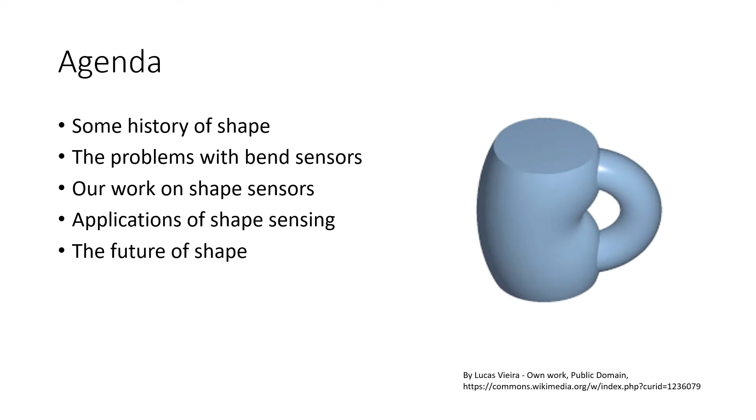And in particular, we'll be talking about ShArc sensors and explaining what those are and what properties they have and why they're so interesting. Then we'll move on to applications of shape sensing, and I think you might find some surprising ones in there. And finally, we'll talk a little bit about the future of shape itself and how that will impact our future lives.

Let's start with a simple example. Let's say I gave you this mug and asked you to measure its shape very precisely so that somebody remotely could look at your measurements and reproduce it exactly. That's actually a pretty hard task if you're using traditional tools. For example, tape measures and calipers are really good at measuring linear distances, but they're not good at measuring curvature.

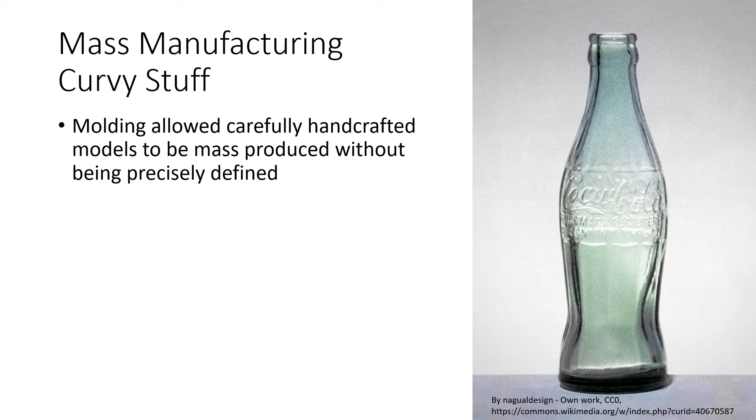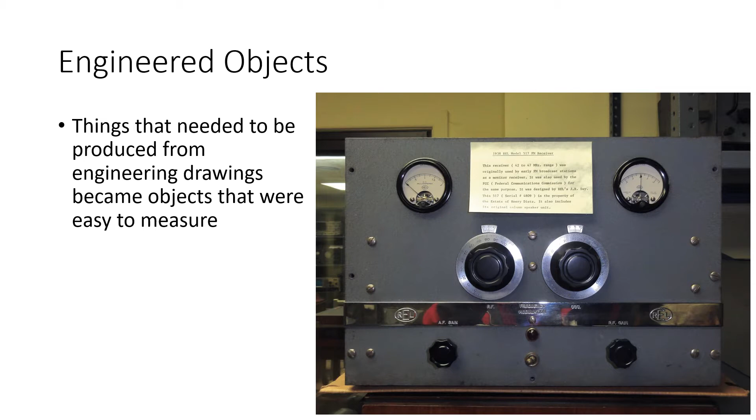Well, as time wore on, clearly there were engineered objects that needed to be done with precision so others could reproduce them. So if you look, for example, at electronics in the 1930s, you could see that they tended to have very geometric designs that were very easy to describe. So this particular object here is actually the first commercial FM radio. I have a connection to this because the case for this was actually designed by my dad in 1938. And you can see that the design here, very simple rectangular things that are very easy to measure using simple tools. And the circles, again, also very simple geometric constructs, very easy to measure and describe.

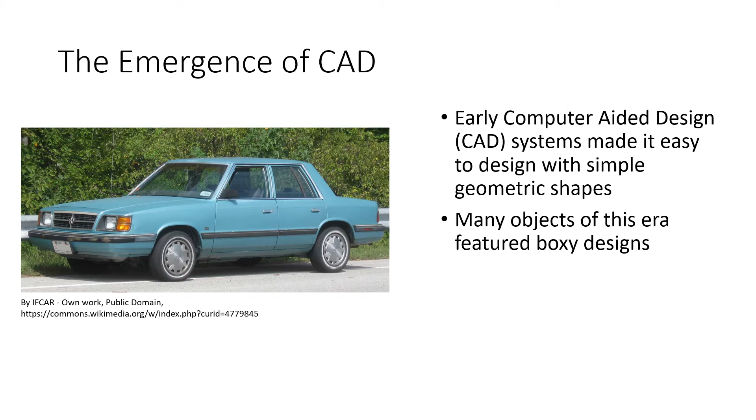By the 1970s, CAD, or computer-aided design, had started to emerge, and we could design far more complex objects using these computerized systems. But those early systems really didn't have good tools for describing shape. And so a lot of the objects that were designed in that era were really combinations of very simple geometric forms. And you can see that in this example of what personally I consider the ugliest car ever made, the Chrysler K cars, that they had these very boxy designs. And to some degree, that was a result of the CAD tools that were used to describe them.

It's often said in design that form follows function. But it's equally true that form follows tools. The sorts of tools that we have available to us very strongly influence the sorts of designs that we make. So if we have tools that make it easy to do simple geometric forms, that's what we tend to design. And that influences even our imagination about what sort of shapes are possible.

I think the best example of this is if you look at the spacecraft of science fiction from the 1970s, they tend to be collections of simple geometric shapes. The Death Star from Star Wars being a simple sphere is a great example of this sort of thing. After decades of drawing tool evolution, we got to the point where we could describe complex curves fairly straightforwardly in our tools. And then you started to see in science fiction that the spaceships that we imagined were very curvy and had very organic shapes. Form follows tools.

So what we've talked about up to this point is static shape. But things get much more interesting when you allow them to evolve and change in dynamic ways. So it turns out that the tools that we have right now are actually very good for describing complex curves, but they're not very good at describing the evolution of complex curves.

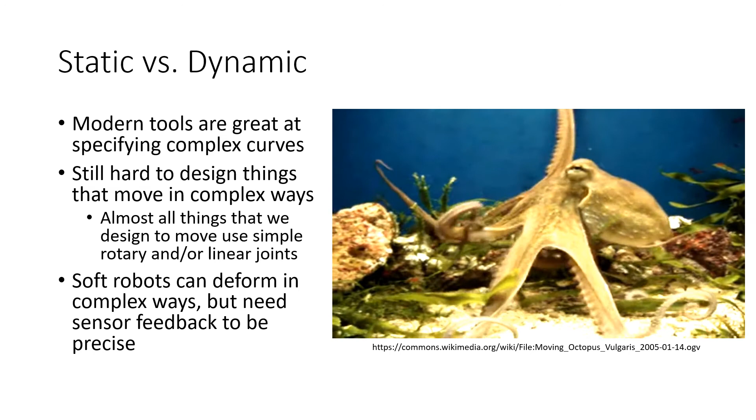It turns out that human motion is also very complex. You might think, oh, well, we just have a bunch of simple joints. But in fact, those joints move around in very complex ways. And there's a lot that you can do with them and the surrounding muscle and tendons that's very non-obvious. We need to understand human motion for a lot of different applications. So for example, if we want to put people in virtual reality spaces, we need to be able to have an understanding of pose in real time. And unfortunately, that's still a poorly understood problem.

There are other places where this need comes up. For example, in understanding how athletes perform, it's often necessary to use sensors to understand their particular pose and how that evolves. Another place is in medicine, when you're trying to get an understanding, for example, in rehabilitation therapy, of how joint movement is evolving as the therapy progresses. These things all need ways of sensing complex human motion.

Well, the way we try to solve this problem now is with these resistive bend sensors. That's the most common solution. And resistive bend sensors are very inexpensive, which is fantastic. They've been around for well over 20 years, but they have a lot of drawbacks and limitations. So the way these things work, they're basically a strip of plastic on which carbon has been deposited. And so when you bend that strip, the carbon is actually strained and pulls apart if you bend it one way, or compresses the other. And that changes the resistance across the strip. And so what you measure with this sensor is the resistance, which is a function of the flex it's undergoing.

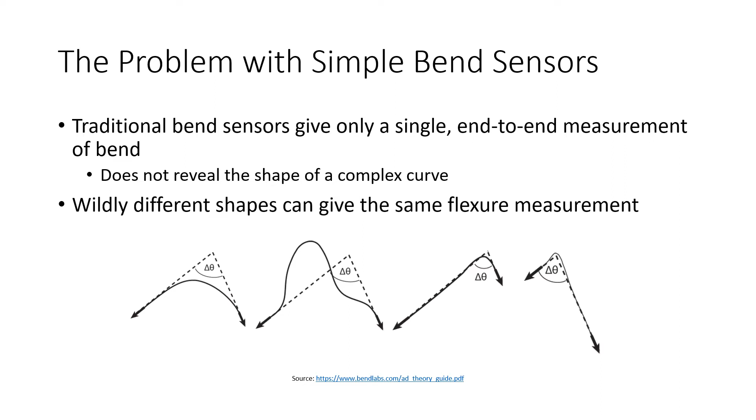So traditional bend sensors are really restricted to cases where you have a single bend. But if you want to measure a complex curve with many bends, you might think, aha, I'll just use a bunch of these bend sensors connected in series so that I can measure all those complex curves. That turns out to be problematic for a very simple reason.

The angular error that you measure at each joint accumulates so that by the time you get to the end, your understanding of the angle is the sum of all the measurement errors along the way. It's this box that you're in. The more encoders you add to get a good understanding of the curve, the more the measurement error increases. That's why these systems are fundamentally not a good choice for measuring complex curves.

So now we get to the really exciting part. And that's the sensors that I've been working on, which are true multi-bend shape sensors. And we call these ShArc for shift arc. And this video explains the basic idea.

ShArc is a precision geometric measurement technique for creating multi-bend shape sensors. These devices are designed to detect curvature in the XY plane. Most bend sensors report only a single number, which is a gross measurement of overall flexure. In contrast, ShArc sensors can provide detailed shape, even when there is more than one bend along the sensor.

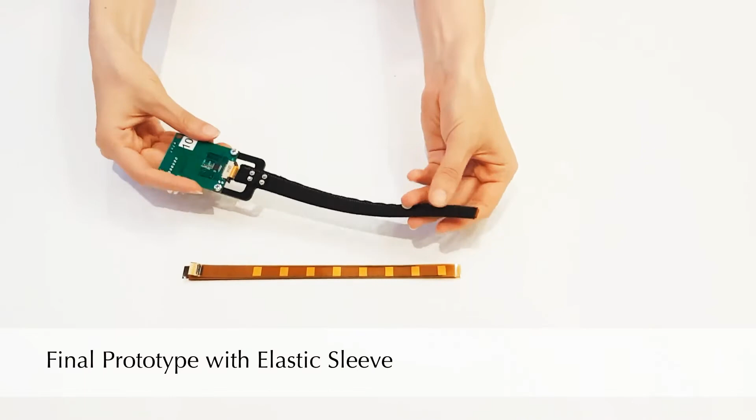ShArc sensors are built using 2 flexible strips that are held a constant distance apart. In our prototype, there are transmit and receive strips that each contain a series of carefully designed electrodes. The spacing between the transmit and receive strips is set by a series of spacer strips. A small clamp on one end binds the stack, and an elastic sleeve keeps the strips aligned and pressed together. A circuit board measures the capacitance between the electrodes on the transmit and receive strips.

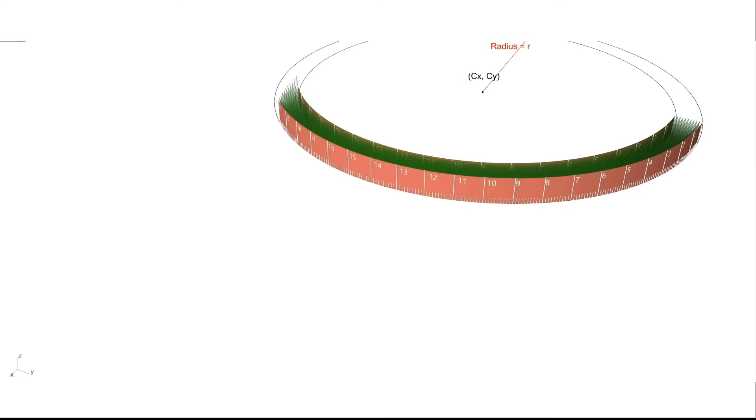ShArc sensors work by measuring relative shift to fit arcs. Imagine 2 measuring tapes held a fixed distance apart and joined on one end. If this unit is held flat, the measurement marks on the 2 tapes will align. But if the unit is formed into a circular arc, the inner strip will have a smaller radius than the outer strip. Assuming the 0 points are constrained to a line, the other marks will drift apart. The tighter the curve, the more the 2 sets of markings will diverge.

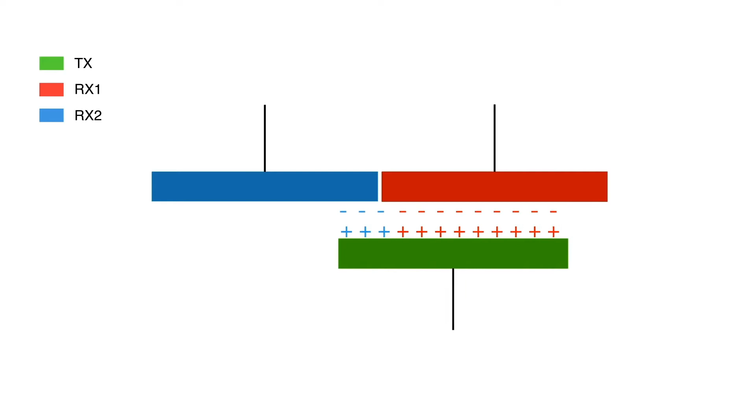This is similar to what happens when a paper book is bent. The binding keeps one side of the pages aligned, but the other side fans out. Our prototype measures shift via changes in differential capacitance. The bottom strip contains a series of transmit electrodes. The top strip has corresponding pairs of receive electrodes. As the transmit electrode shifts relative to the receive pair, the circuit becomes unbalanced, creating larger capacitance to one side or the other. Measuring this differential capacitance reveals the degree of shift.

Our prototype has 8 measurement pairs. When flat, all are aligned, giving 0 differential capacitance. But as the sensor is curved, the transmit and receive strips progressively misalign. By measuring the shift over each segment, we find its radius of curvature. Because the total shift to any measurement point is the sum of the shifts in all of the segments, the total curvature to any point can be found irrespective of any subsegments. This gives ShArc sensors a unique tolerance to measurement errors. Unlike jointed systems with encoders, angular errors do not accumulate with each measurement point.

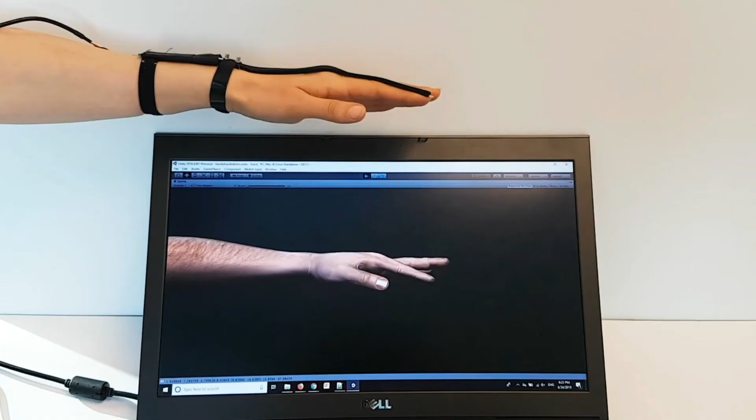We prototyped a number of sample applications for our sensor. Our first demo uses the sensor to detect the shape of a bent finger, as might be used in a virtual reality glove. Because the shape is modeled by many arcs, there is no need to make presumptions about the location of finger joints, as is required with less capable sensors. Given the precision of the device, it is ideal for measuring complex curves on objects.

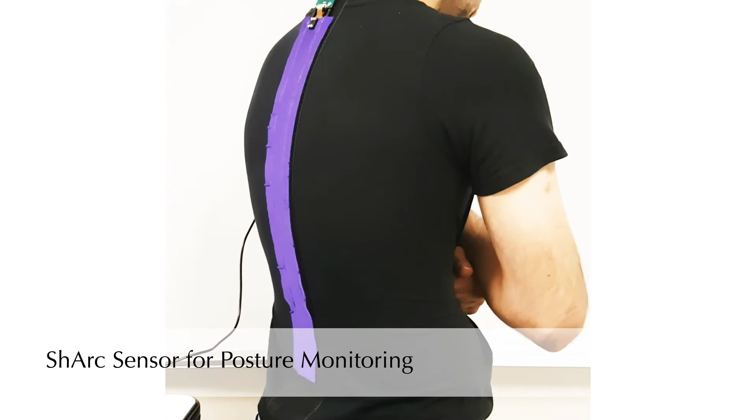Shapes of real objects can easily be entered into CAD or other drawing packages. We created a long version of our sensor to detect curvature of the spine. This is useful for providing real-time feedback and long-term monitoring of posture. This also suggests many applications in physical and rehabilitation therapy.

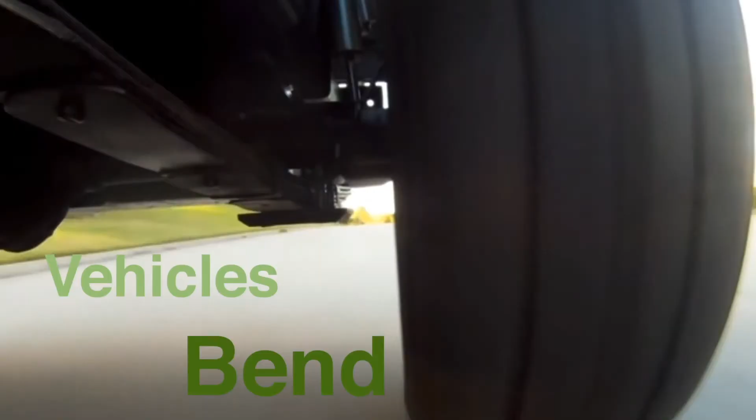Everywhere we look, we see things that bend. ShArc sensors provide a precise and cost-effective way of understanding the shape of our world. Over the last year, we've been busy making a commercialized version of the ShArc sensor that really is a second generation ShArc sensor, which we call BendShape. Here are some of the characteristics of this new version.

Again, it's 160 millimeter sensing length, which is about the same as the first generation. But instead of 8 segments, it has 16 segments. The read time is 6.5 milliseconds. So this means this sensor runs at over 150 hertz. So it's quite responsive, quite fast.

Another key change is that the sensing bend limit on the original prototype was limited to a maximum of about 180 degrees anywhere over the sensor. Well, on this device, the limit, because of a new encoder design, is actually per segment. So the limit here is about plus minus 90 degrees per segment. And in fact, you can coil this thing up into a spiral and actually have that work. So it's a much greater range of motion that this sensor can sense.

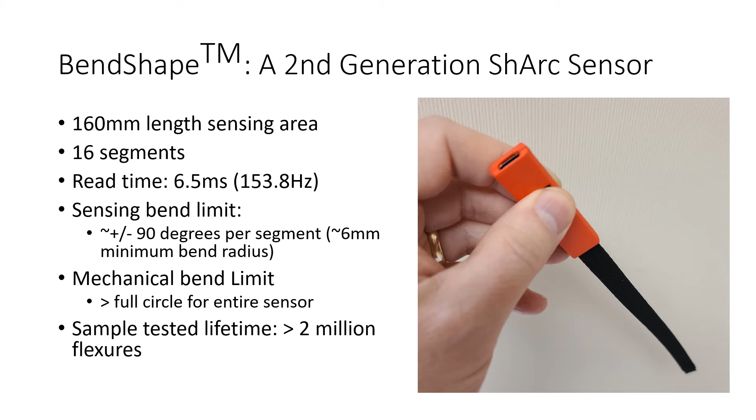Really, the limit on that is the mechanics. So if you want to keep it accurate, you probably don't want to go much beyond a full circle. But for most applications, that's certainly sufficient. And we've also been life testing these devices, and we are seeing lifetimes in excess of 2 million flexures. Basically, we stopped testing after that. So these devices are looking very promising.

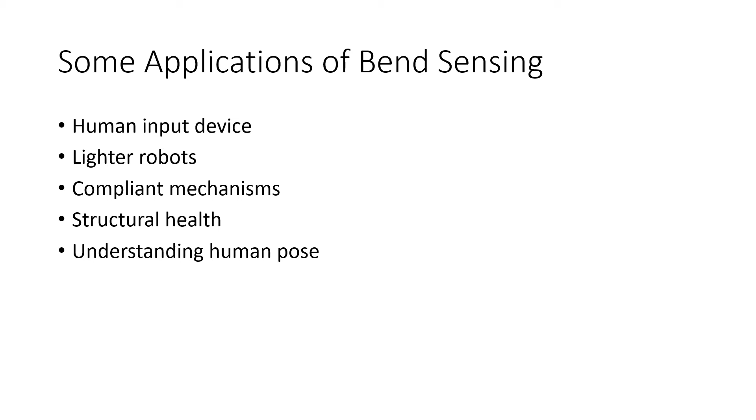Next, we're going to take a look at some of the applications for bend sensors. There are quite a few, and we're just going to touch on a handful, just the tip of the iceberg. Let's consider the use of shape sensors as expressive input devices. Now, shape sensors are kind of like knobs and sliders in that they're physical devices, and you can feel physically where you're manipulating them to. But they're quite different from those devices because they have many degrees of freedom.

Your typical knob or slider is only 1 degree of freedom, but these devices are actually putting out lots of data, and that makes them very expressive. And that's good for a lot of applications where you want to dynamically control some expressive thing. And typically those applications require a fast response, so it's a good thing that ShArc sensors are fast. So I want to give you a little example of this.

We've been working with the University of British Columbia, and we have a paper that we'll be presenting at the New Interfaces for Musical Expression conference later this year. But I want to just show you a little bit about the power of using a shape sensor as an expressive musical device.

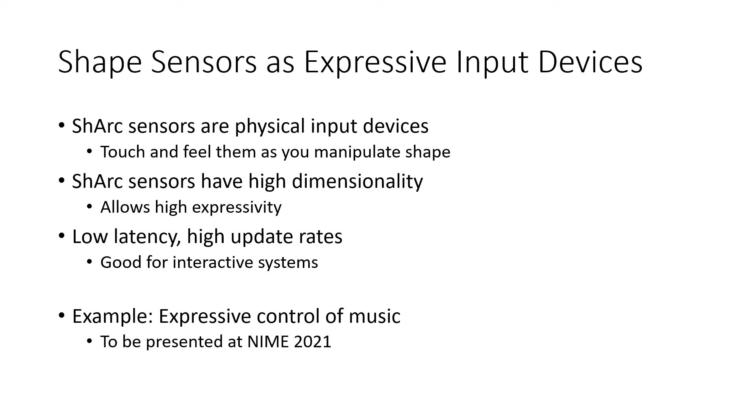For the guitar effect, I created a vocal synthesis engine, which we'll call the VOC plugin here, using Paul Batchelor's VOC library, which is based off of Pink Trombone. This model of the vocal tract treats it as a series of 44 cylinders whose diameters filter an excitation signal to create human voice sounds.

To control using Bend Shape, we partition the sensor into 40 segments and use a Y position value of each of these segments to control the tongue shape of our tract model. To use this as an effect, we can use any instrument as an excitation signal and shape it using the VOC plugin. This next clip demonstrates how it sounds when used on an electric guitar.

Shape sensors are going to revolutionize the way that we build robots. That's a pretty strong statement, but let me explain why. The typical industrial robot arm right now weighs about 10 to 20 times as much as its maximum payload. Now, obviously, that's not true for us. We can lift things easily that are close to the weight of our arm. So why are these mechanical devices so limited?

Well, the answer is pretty straightforward. It's because they count on joint encoders to accurately know the position of the arm. For that to work, you've got to make sure that the arms do not flex, because otherwise the measurement would be off. And so these arms are typically way overbuilt, not just to hold the weight, but to hold it without flexing at all. And that's hard, and it's what makes robots very heavy. And it's not just robots, there's all sorts of mechanical devices that have this problem.

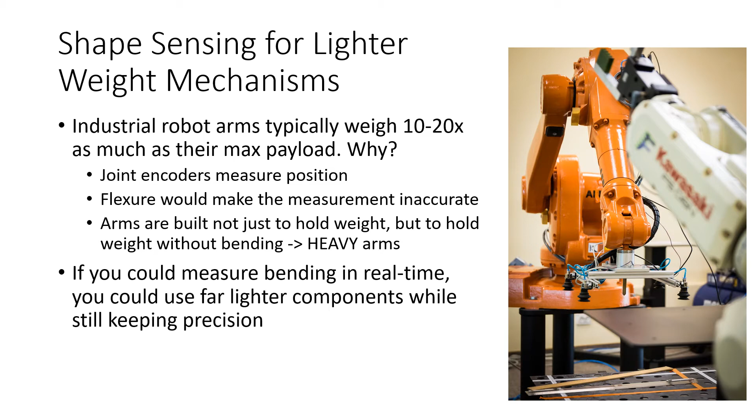So imagine now instead that you had a device that let you understand in real time exactly how the mechanism is bending. Well, then you can put that into your feedback loop, and it's okay if the thing bends. So in fact, you could build much lighter mechanisms for robots and similar sorts of devices. This is going to be a super important application of bend shape sensors.

In our robot arm example, flexure was an undesired thing that we were creating an ability to work around. But what if flexure was actually something that you were using as a design element, that you specifically wanted things to flex, and that was a critical part of their operation? So this field is known as the design of compliant mechanisms.

And so, for example, we've been talking with our friends at Brigham Young University, Larry Howell's group, that has been working on compliant mechanisms for quite some time. And these are a really intriguing thing because it gets around this problem I talked about earlier of most things that are designed to move are designed to do it using either simple rotary or linear joints. But when you design things to flex, there's a lot of advantages to that rather than making traditional joints.

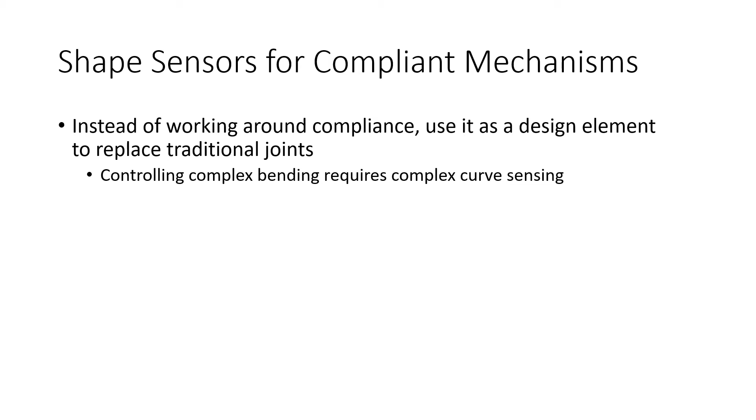The thing to keep in mind is that the problem with doing compliant mechanisms traditionally has been there's no good way to get feedback for their state. Well, shape sensors let you do that. So let me just give you an example from Larry Howell on the power of compliant mechanisms.

It's always been considered to be bad to have flexibility in your machines. Well, we've tried to take that thing that everybody hates, that everybody is trying to avoid, and say, how can we use flexibility to our advantage? How can we use that to do cool stuff? Probably the first compliant mechanism I ever designed was this thing. What it is, is a compliant mechanism that is a gripper. So you can put something in there and it'll get actually a really high force. I can put that in there and it breaks the chalk.

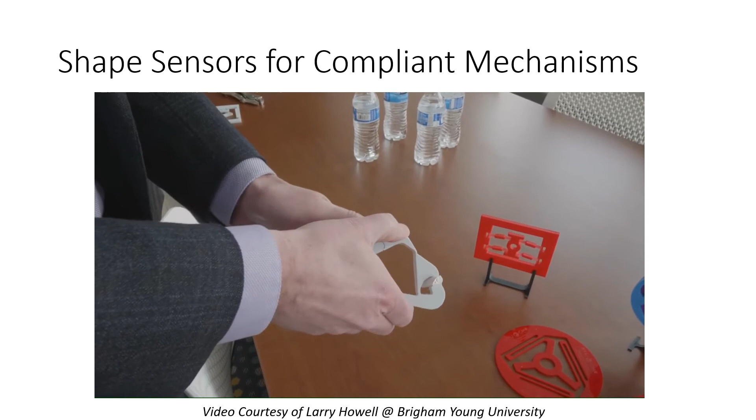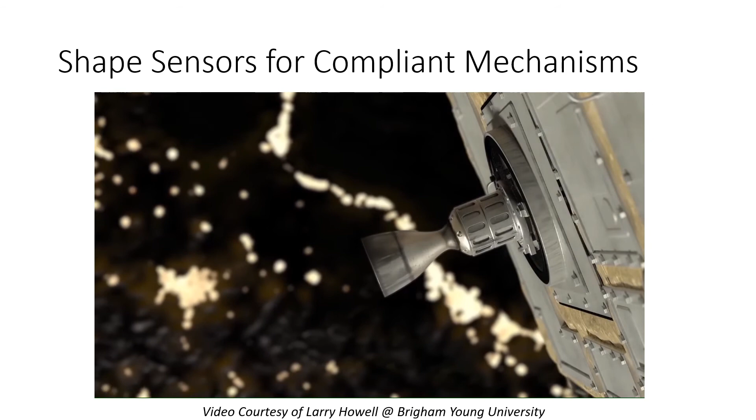So that looks like a crazy beast, but every part in there has a purpose. All these flexible beams, here are the two inputs. And again, we did this with NASA for a thruster application where you can put a thruster right there. And now with our two motor inputs, we can direct that thruster in any direction. That titanium device moves that. And you notice that it's just all bending. And then there's no pinch points for the fuel lines or electrical lines coming in.

Another really interesting application of bend sensors is in structural health monitoring. So we've already discussed that ShArc sensors don't need recalibration, that they can work for decades without the need to recalibrate them. That makes them ideal for monitoring structures like bridges and buildings to see if they're deforming. And so that's a really great application. But in some ways, that's not using the full capability of the sensor because ShArc sensors are also fast. So you can actually monitor real-time fatigue.

So for example, if you consider something like an airplane wing, as the plane flies, the wing is bouncing around all the time. And all that accumulated stress is potentially fatiguing the metal over time. Well, if we can monitor that fast enough, we can actually create basically a gas gauge for materials to know when they're reaching their fatigue limits so that we know when we will need to replace things based on not just how much time they're up in the air, but the actual stresses and forces that were applied to them in operation.

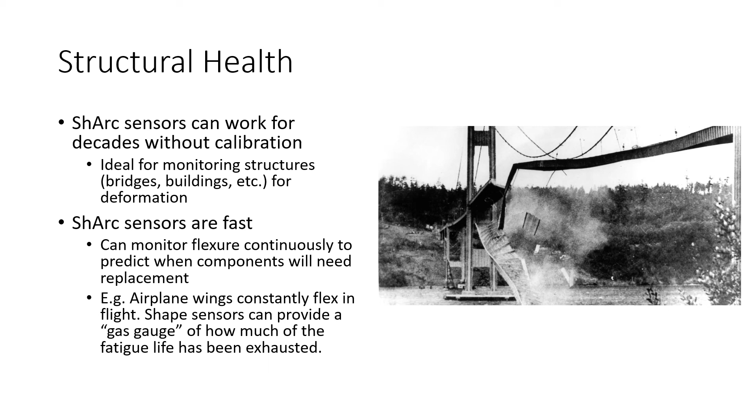These sorts of bend sensors are also great for understanding human dynamics. And I probably don't have to tell anyone here that pose tracking for AR and VR is an important application and something that finally you can do with precision without having to have a device that's offset and looking at somebody, but can actually just be built into their clothing so that you can know with precision what they're doing. Of course, that same technology has lots of applications in things like rehabilitation therapy.

So one of the things that we've realized talking to customers for our bend-shape devices is that there's a huge market for doing clothing that can monitor humans. Just like we do structural monitoring, we can do monitoring of humans to know in the workplace: are you stressing your back? How much accumulated fatigue do you suffer in the day walking back and forth through the warehouse? These are the sorts of things that we can know in detail. And so we know that shape sensors are going to become a very important tool for understanding human performance in those sorts of situations.

Another interesting thing is that because we have such detailed data on shape, we can use this for all sorts of super interesting medical monitoring applications. So for example, if you can put these sensors, encase the body in them, you can understand in detail three-dimensional shape in motion. So you can understand dynamically how is blood pooling in the body, what is happening with the lungs as you breathe, what's happening with the position of a fetus, and all sorts of subtle shape changes can be monitored in detail very inexpensively.

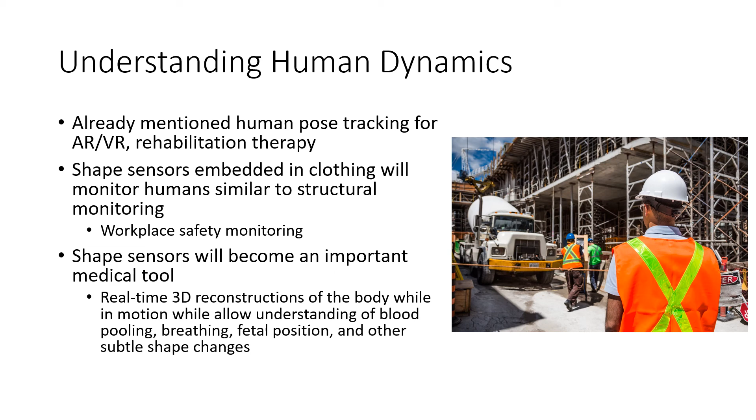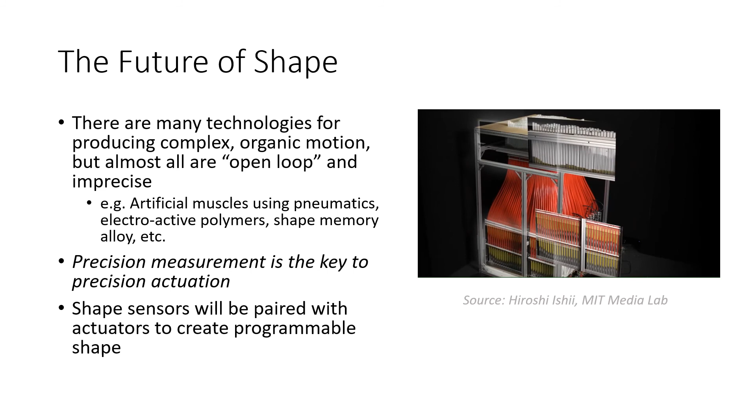Well, those are just some of many applications for shape sensing, but I want to take a few moments now just to look forward and think a little bit more generically about the future of shape. So as we speak, there are actually many technologies in development that allow very detailed actuation. So for example, in the soft robotics community, you see a lot of work around artificial muscles using pneumatics, electroactive polymer actuators, shape memory actuators.

And the thing that's nice about these things is that you can have lots of them. You can have very dense arrays, and you can do really interesting stuff in terms of creating complex motion. But the problem for all of these has been that you don't have good feedback mechanisms, that these systems tend to work open loop right now. And precision measurement is the key to precision actuation. So once you have the ability to sense this stuff, you have the ability to move it precisely. And so clearly the sorts of sensors that we've been looking at are going to be paired with detailed sorts of actuators to create true programmable shape.

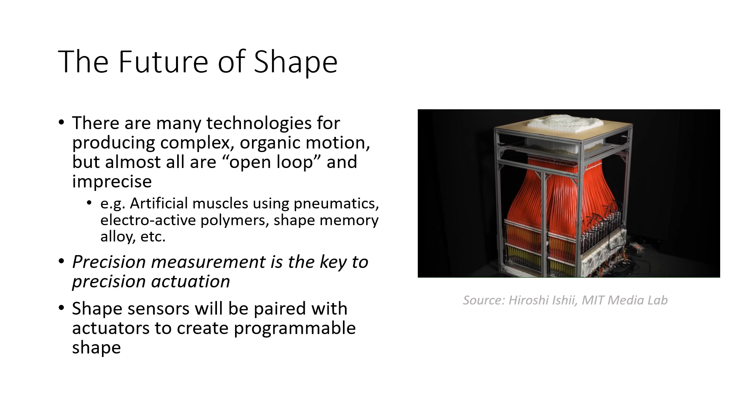You know, I love the work that's been done by Hiroshi Ishii's group at the MIT Media Lab to give us a little glimpse of what this might be like when surfaces can just be programmed. Well, of course, this is very intriguing, but the mechanism just seemed crazy, right? There's all this hardware, it draws a ton of power, it's very expensive. But in the future, you're going to be able to do these things with simple strip devices that provide actuation and sensing just in that strip form factor.

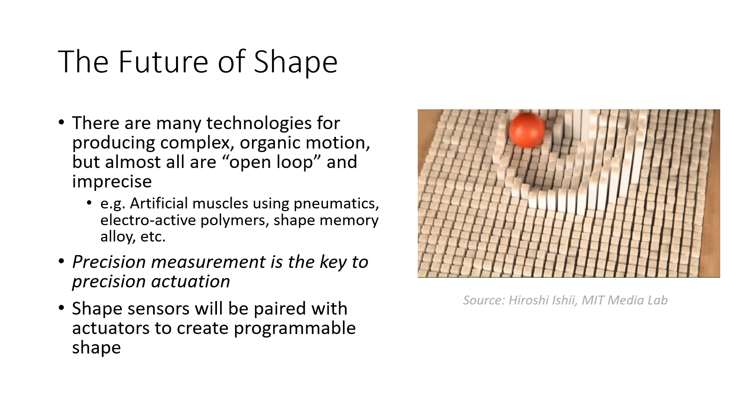So when I think about programmable matter of the future, I kind of think of it in stages, kind of a hierarchy. So at the very bottom, there's this ability to program shape that will have these simple strip actuators that you'll be able to command with precision to go to a particular shape and hold that. But it gets more interesting once you say, I can do that, but I can keep changing it all the time. I can dynamically program the shape, so I can have movement and I can control how the shape evolves over time.

The next level beyond that is when you integrate sensing with those strips. And in fact, there's lots of sensing modalities that integrate into that strip form factor very easily. So for example, sensing pressure or proximity or temperature is pretty straightforward. So once you have those sorts of sensing capabilities built into your programmable matter, that means the shape can react to it in real time in interesting ways.

So for example, you'll be able to program behavior at a very detailed mechanical level. So if you want a section of the strip to feel springy, you can do that by basically programming in an F = -kx sort of behavior. Or if you want it to click like a switch, you can program in that sort of nonlinearity. So that's what you can do once you have those sorts of simple sensors in there.